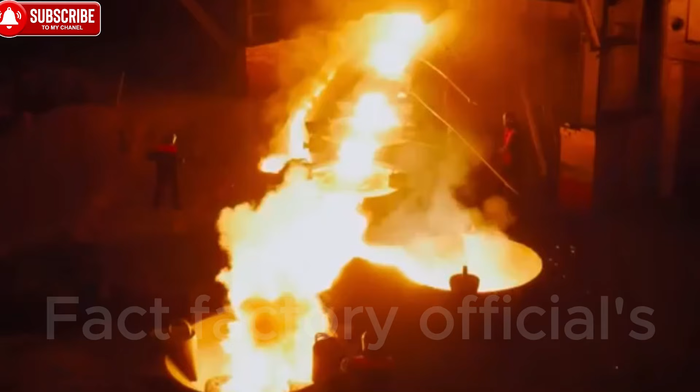Did you know that the same metal used in weapons that once changed the course of war, from supersonic jets to deep-diving submarines, is also inside the phone you're holding? That metal is titanium, one of the strongest and most resilient materials ever mastered by humans.

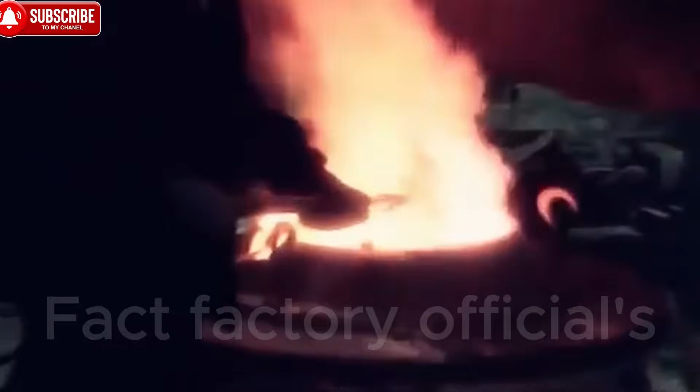Although fairly common in the Earth's crust, titanium rarely exists in pure form. Instead, it lies hidden in hard minerals like ilmenite and rutile, making extraction extremely difficult. To bring it into usable form, the ore must be crushed, refined multiple times, and heated at extreme temperatures. Only after passing through each of these demanding stages does titanium emerge as a dull, silver block, light yet remarkably tough, able to withstand seawater, extreme heat, and relentless corrosion.

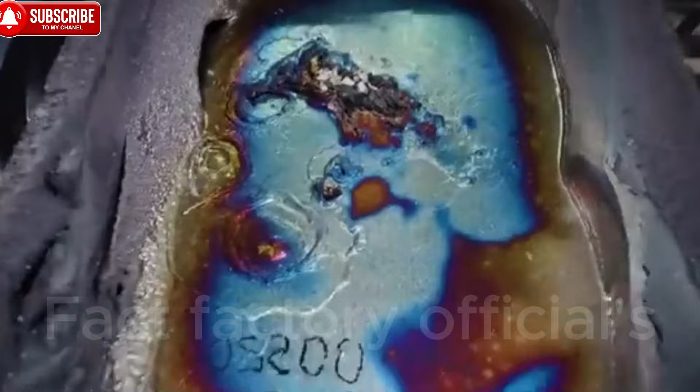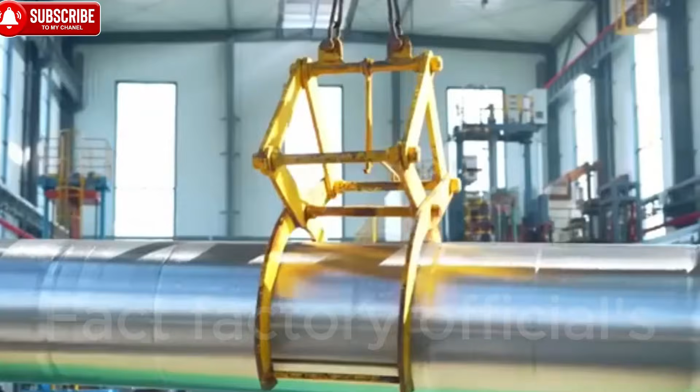This is more than a story of metallurgy. It's proof of humanity's drive to expand the limits of what is possible. Stay with us as we follow the journey of titanium, an element as steadfast as it is untamable, and uncover how it has finally been conquered.

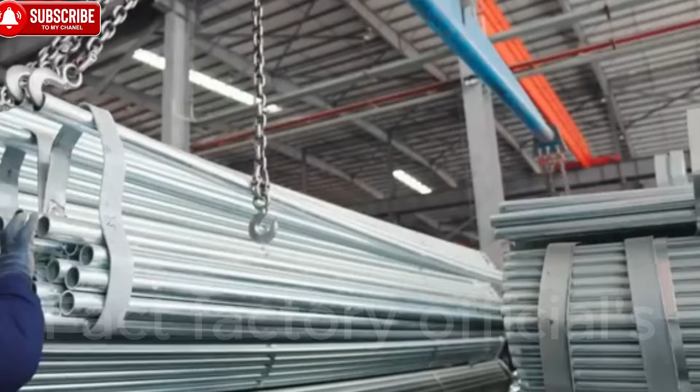Titanium's role in modern civilization. Titanium has moved far beyond being just a chemical element. It has become the material capital of our civilization. Its true value lies in unlocking what was once impossible: lighter yet stronger aircraft, corrosion-resistant submarines, and medical implants that can last a lifetime. In this way, titanium not only fuels billion-dollar industries, but also redefines safety, health, and technological progress, cementing its role as a driver of advancement.

Even so, titanium isn't always the ultimate choice. Its high extraction and processing costs often push industries to favor aluminum or steel, materials that are cheaper and easier to produce. Even Apple, which once positioned titanium as the hallmark of premium design in the iPhone Pro, is now reportedly considering a return to aluminum for both economic and environmental reasons.

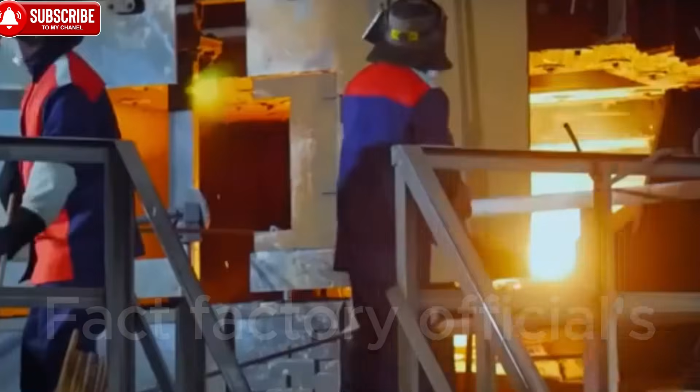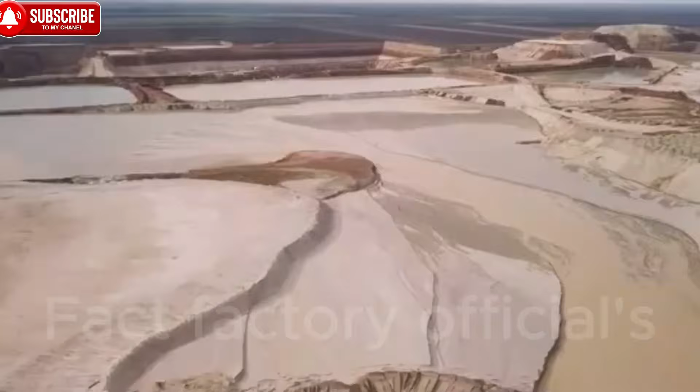Titanium ore mining and beneficiation process. The process of extracting titanium begins with surveying and mapping deposits rich in ilmenite or rutile. These two minerals contain the highest concentrations of titanium oxide and are typically found in coastal sand dunes or buried deep within ancient rock layers.

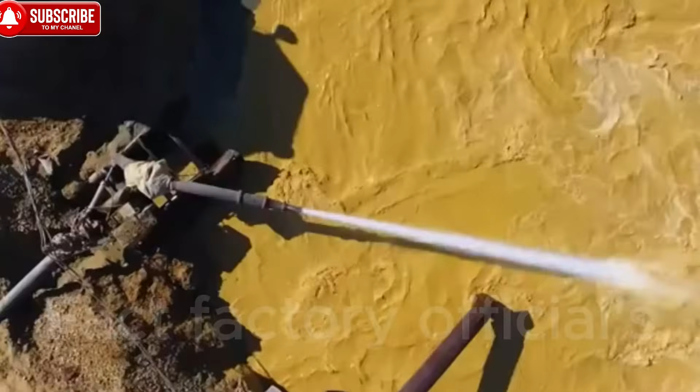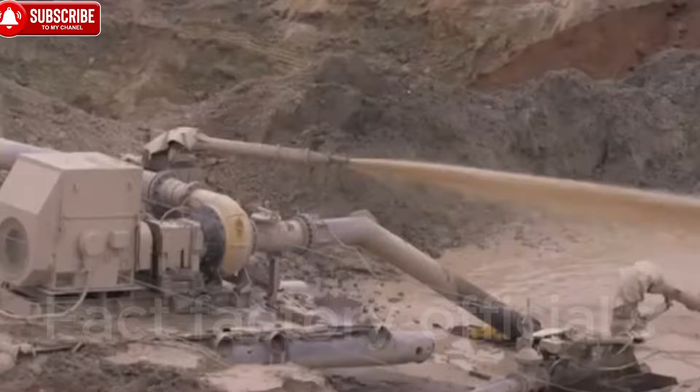In coastal placer deposits, large-scale hydraulic pumps blast powerful streams of water into sandbanks to loosen the ore grains. The water not only washes away impurities, but also exploits density differences. The heavier titanium-rich particles quickly settle, while lighter sand is carried off. The resulting slurry is then channeled through pipes or flumes into a primary separation station, greatly reducing the volume that needs to be moved by heavy machinery.

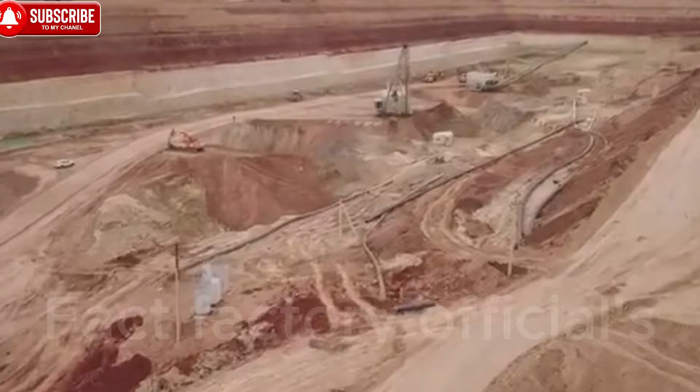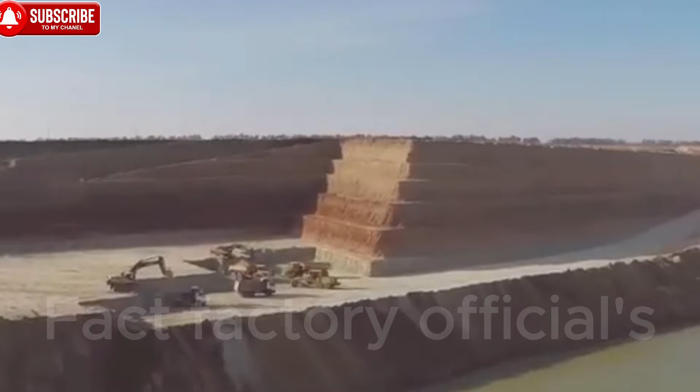For inland deposits, the approach is different. Heavy excavators strip away the overburden to reach the ore body directly, after which specialized trucks haul the raw material out. At the stockyard, the ore is screened and washed to remove soil and gravel before being delivered to processing plants. Whether from coastal placers or inland mines, the common thread is the sheer mass of material that must be shifted and the enormous amounts of water consumed, factors that make titanium mining as much an environmental management challenge as it is a technical one.

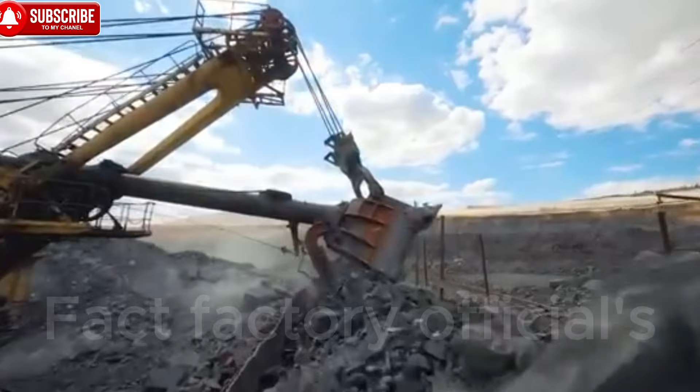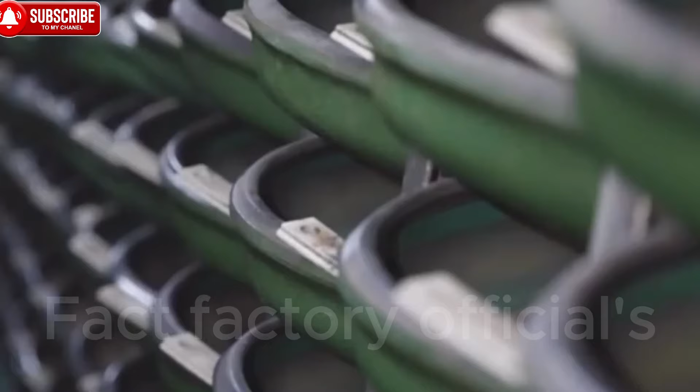Once the ore has been extracted, it is crushed into smaller fragments and fed into a series of separation processes. Gravity separation isolates the heavy titanium-bearing particles. Magnetic separation removes iron-rich minerals, and flotation eliminates silica along with other light impurities. Each stage acts like peeling away successive layers of armor, leaving behind only the concentrated ore with a titanium dioxide content high enough for industrial use.

This marks the close of the mining phase, where a mass of dull reddish-gray sand is gradually transformed into a strategic raw material ready to begin its next journey.

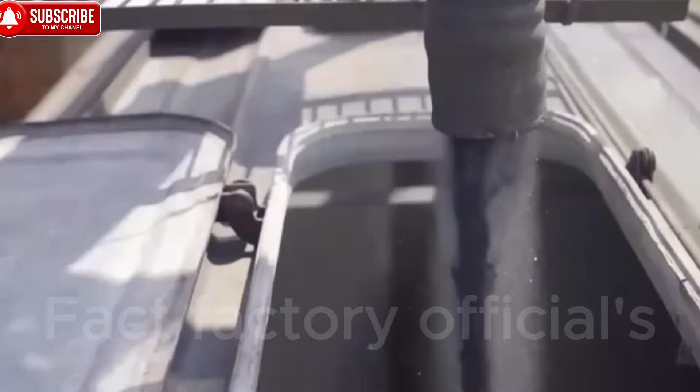Kroll process, from ore to titanium sponge. Once the titanium concentrate has been enriched, it is transported to metallurgical plants for the decisive stage, transforming mineral ore into metal. The first step is converting the ore into an intermediate compound.

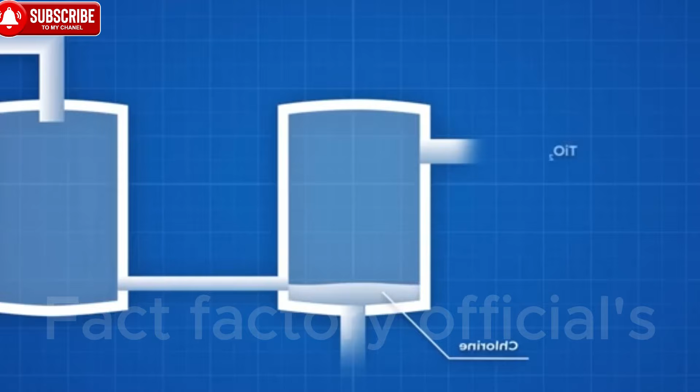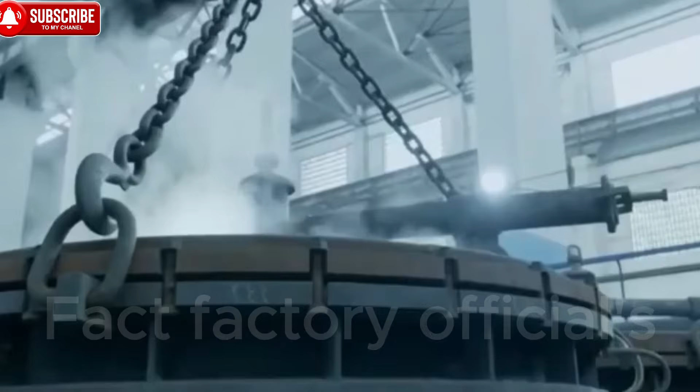Inside sealed furnaces at extreme temperatures, the ore reacts with chlorine gas and carbon, producing a liquid compound that is easier to handle. This solution is then filtered and distilled repeatedly to remove residual impurities like iron or manganese, since even trace amounts can undermine titanium's remarkable strength. When the intermediate compound reaches the required purity, it is introduced into massive steel reactors.

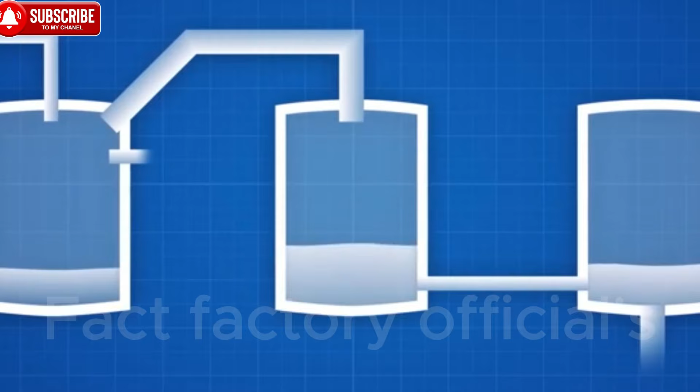There, it reacts with a stronger metal, usually magnesium or sodium, under intense heat and tightly controlled conditions. Over the course of many hours, titanium gradually precipitates, forming spongy deposits that cling to the walls of the reactor. What emerges is not a gleaming ingot, but porous titanium sponge, gray-silver in color, rough in texture, and riddled with tiny voids like a honeycomb.

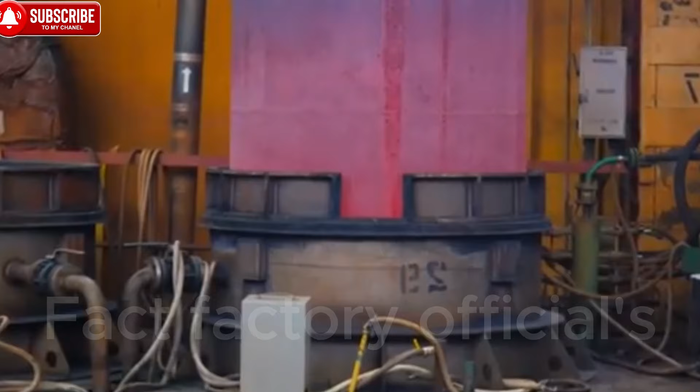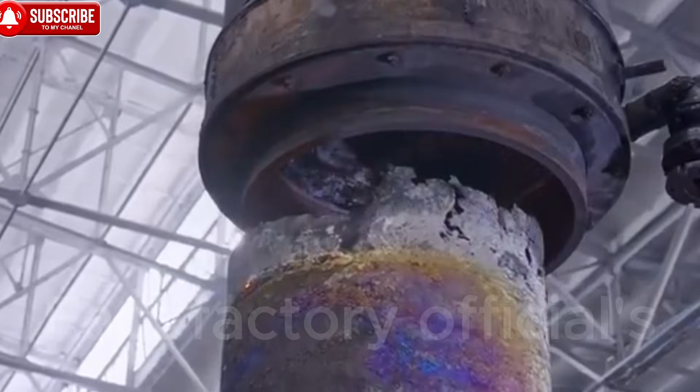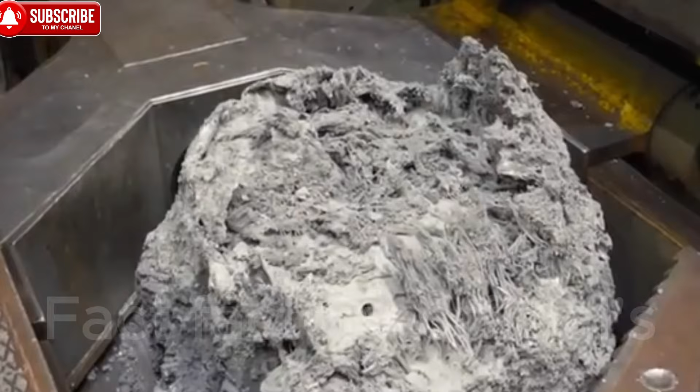After the reaction ends, the reactor is cooled and opened. The coarse sponge blocks are removed, broken into smaller chunks, and washed to eliminate residual salts. This is the very first appearance, still brittle and impure, not yet ready for practical use, but representing a turning point. From an anonymous ore buried deep underground, titanium has finally taken shape as a real metal, poised for the next stage of refinement. Vacuum arc remelting stage.

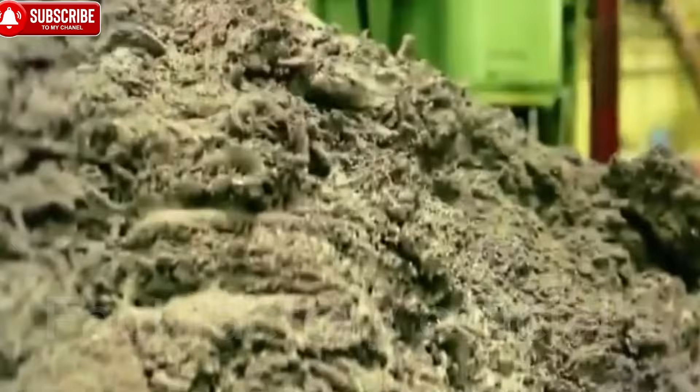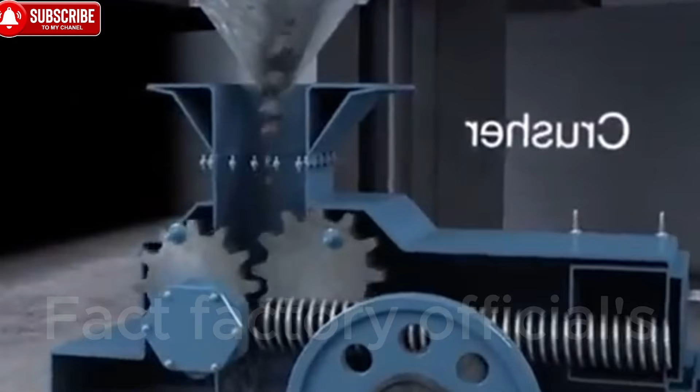When the Kroll reactor is opened, the raw titanium sponge emerges, its silver-gray surface rough and uneven, still coated with residual salts. The first step is breaking it down. The sponge block is cut into smaller chunks, both for easier handling and to remove the outer salt layer. These fragments are then washed in a specialized solution to dissolve magnesium chloride and other lingering impurities. Once cleaned, they are carefully dried, yielding a pure titanium sponge.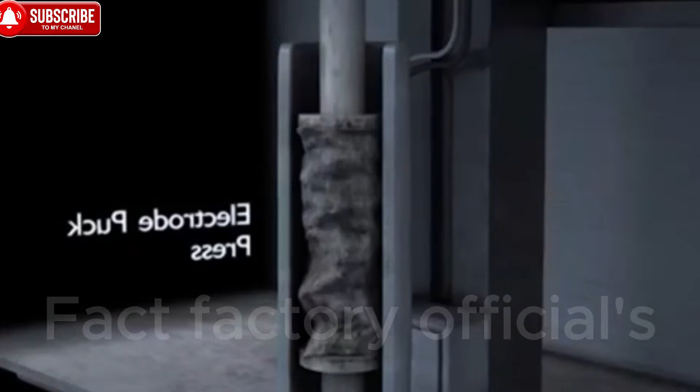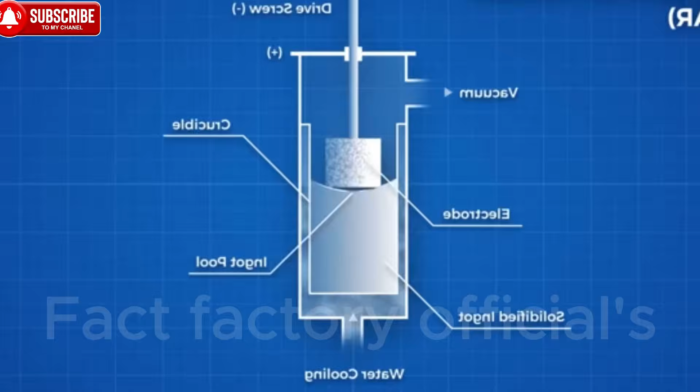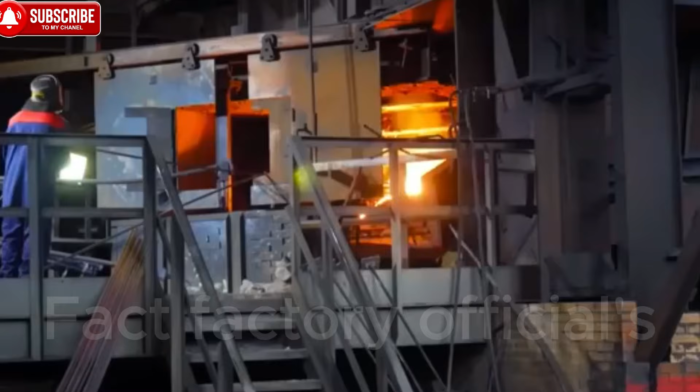The purified titanium is then ground and graded before being compressed into solid blocks known as titanium electrodes. This prepares the material for the most advanced stage of refinement, vacuum arc remelting. Inside a VAR furnace, the titanium electrode is positioned vertically above a water-cooled copper crucible. As a powerful current strikes, an intense electric arc ignites, melting the titanium layer by layer. Droplets of molten metal fall to the bottom, gradually consolidating into a dense ingot of titanium, uniform, highly pure, and ready for use in industries where strength and reliability are paramount.

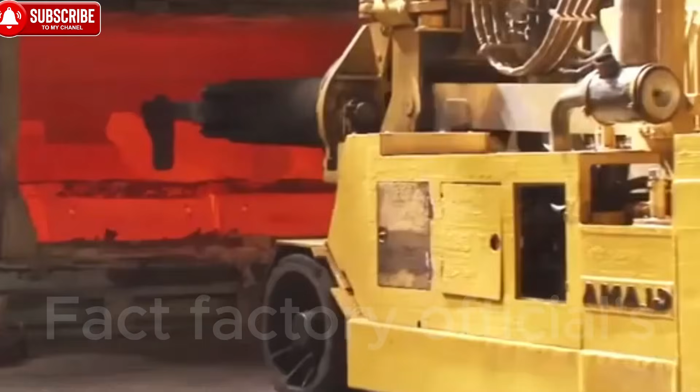Forming and precision CNC machining. Fresh out of the furnace, the refined titanium ingot still glows red-hot, with its surface temperature soaring above 1832 degrees Fahrenheit. In this state, the metal is far more malleable, making it ready for the first stage of shaping.

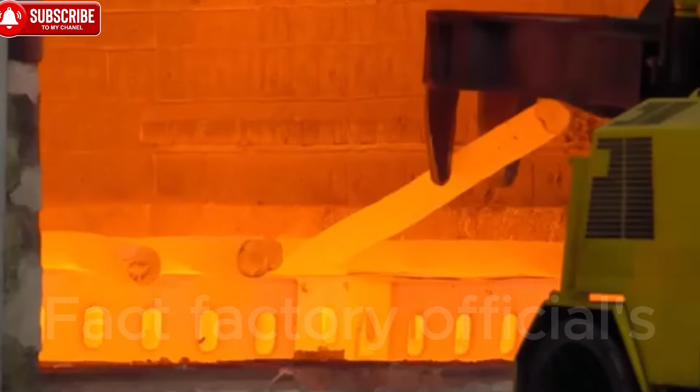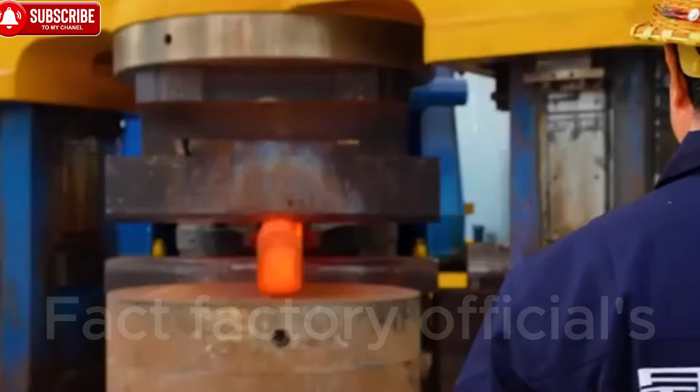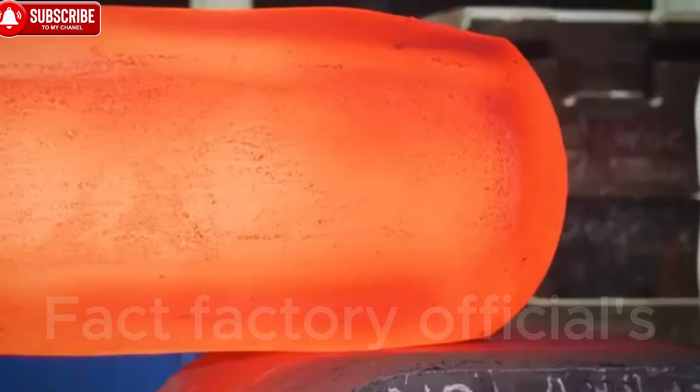A massive robotic arm clamps onto the multi-ton ingot and transfers it into a hydraulic press. Here, giant pistons descend with crushing force, each strike echoing like thunder. Under this immense pressure, the rough cylindrical block begins to transform. Its surfaces are flattened, its length stretched, and its shape made more uniform. Just as important, the forging process densifies the internal structure, eliminating the tiny voids left from casting and realigning the crystalline grains, giving the titanium greater mechanical strength.

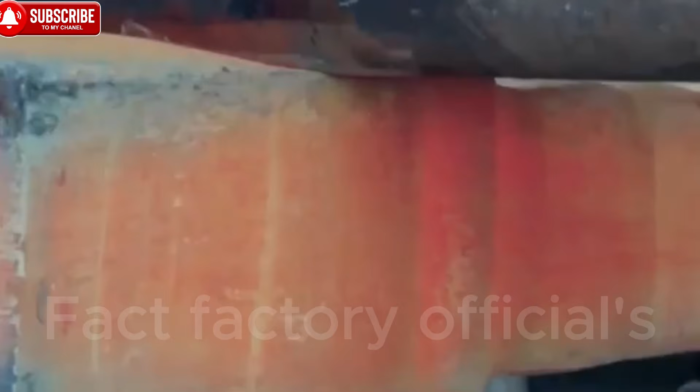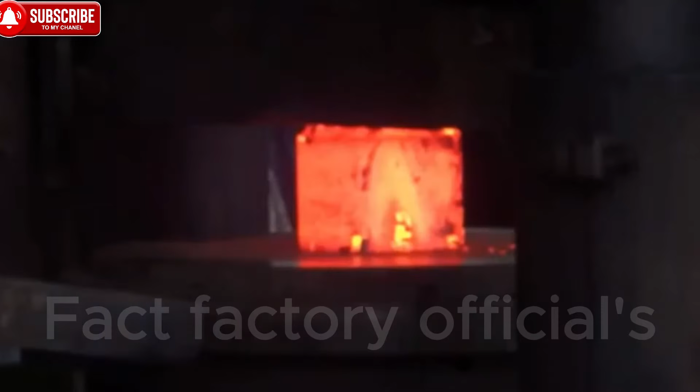Through repeated pressing cycles, the glowing ingot gradually becomes a precisely formed billet, consistent in quality and shaped for the next stage of rolling, forging, or precision machining. This marks a pivotal moment when titanium leaves behind its raw cast form and enters its life as a true industrial material. Once titanium has been rolled into standardized billets, the stage of mechanical machining begins.

The ingots are first cut and ground to remove the oxidized layer formed during refining. Sparks fly beneath the grinding wheels. Every millimeter of excess metal is stripped away, leaving behind a flat, clean surface ready for precise processing.

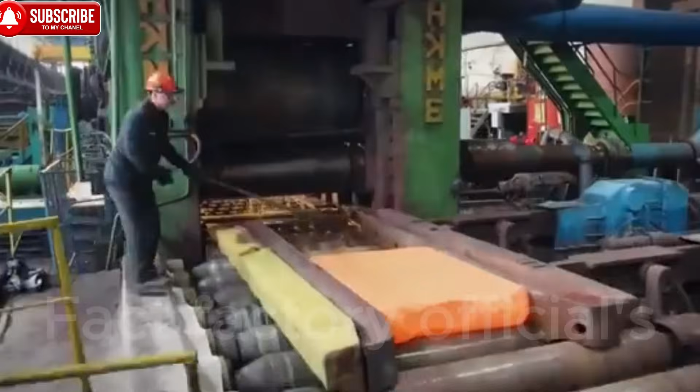Next, the titanium moves to industrial lathes and milling machines. Large blocks are cut down into smaller product-ready forms. Because titanium is exceptionally hard and retains heat, the entire operation relies on continuous cooling systems that protect the cutting tools and prevent the metal from warping.

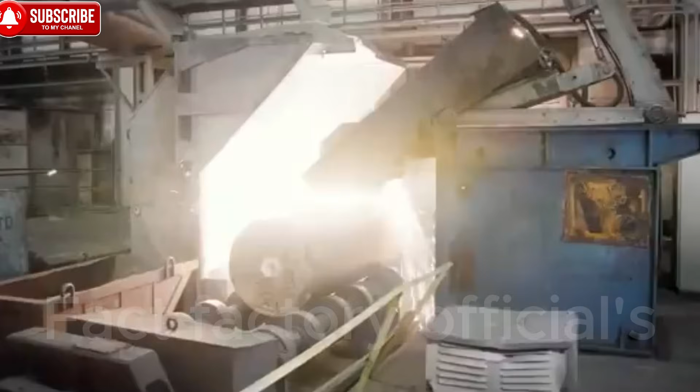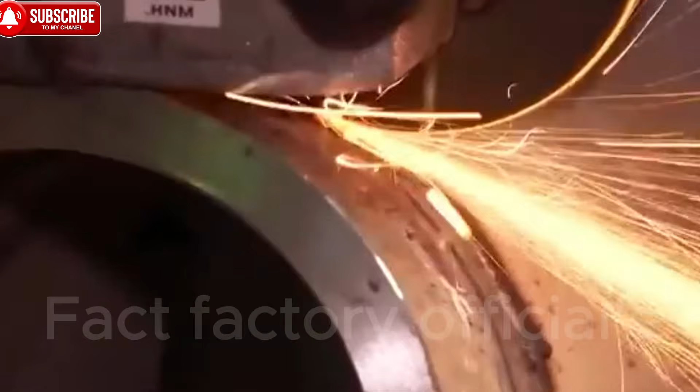The critical step is CNC machining, where computer-guided precision comes into play. On the CNC table, titanium is firmly clamped in place, while high-speed cutters follow a pre-programmed path. This enables turning, milling, drilling, and engraving to be performed on titanium, despite its reputation for being notoriously difficult to machine, with tolerances measured in mere thousandths of a millimeter.

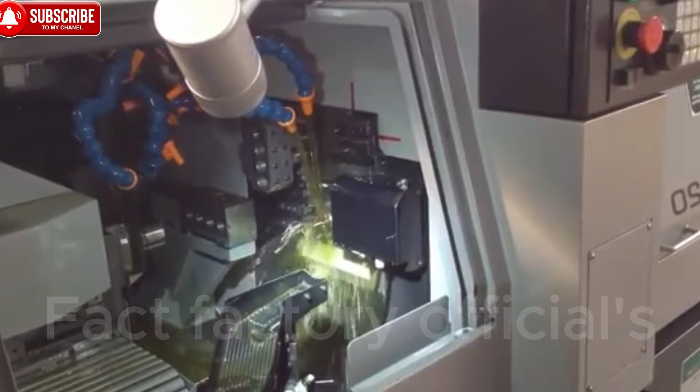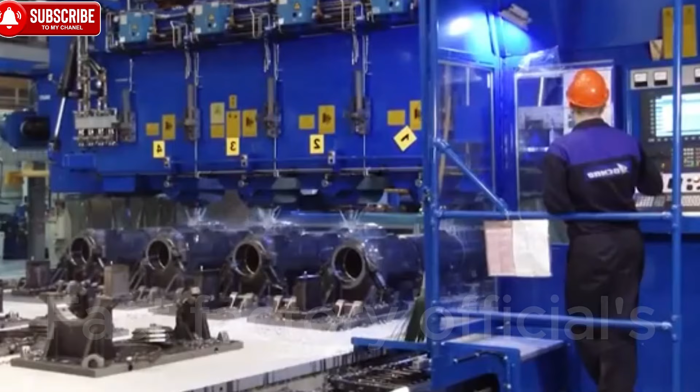It is through CNC that titanium becomes the core of high-demand components, from jet engine turbine blades to submarine hulls to artificial bone joints in medicine. Each stage of machining reflects both the power of modern machinery and the tight oversight of skilled operators. The result is highly accurate titanium, semi-finished parts, ready to serve some of the most demanding industrial and technological fields.

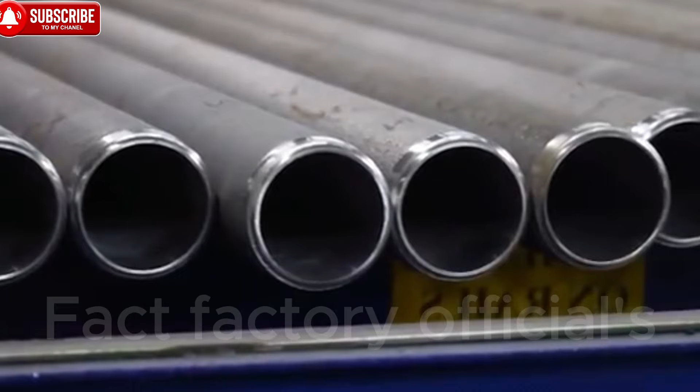Titanium bar packaging and storage. For titanium bars, once rolling and machining are completed to specification, they are bundled together, ranging from a few dozen to several hundred pieces, depending on size. Each bundle is tightly secured with steel straps, then wrapped in plastic or oil paper to protect against moisture and prevent scratches during transport.

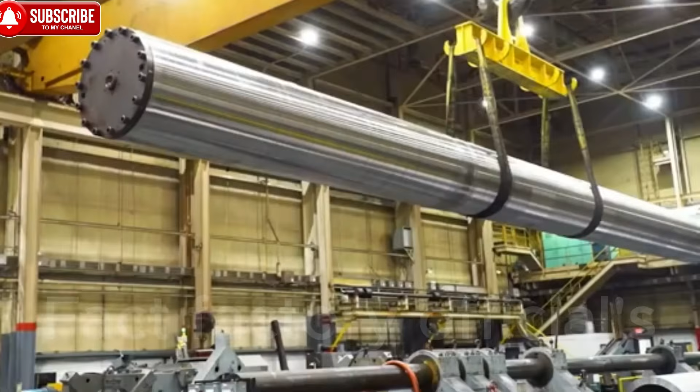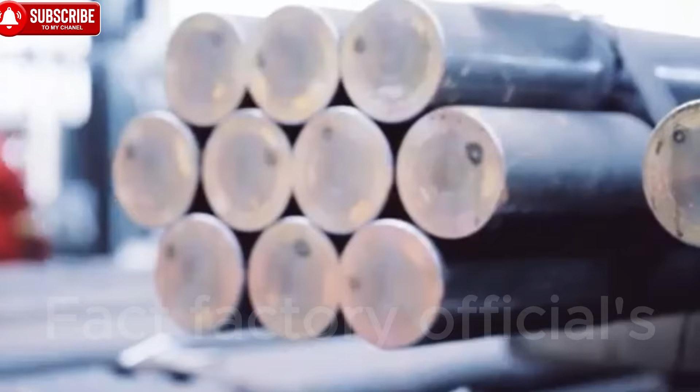At both ends of the bars, manufacturers print or attach identification tags with detailed information: alloy grade, dimensions, batch number, and weight. The bundles are then placed on wooden pallets or steel frames and firmly fastened with industrial strapping. This packaging shields the titanium from environmental exposure and ensures efficient handling, loading, and storage. From aerospace factories to precision engineering workshops and chemical plants, this careful preparation guarantees that the titanium arrives ready for its next stage of use.

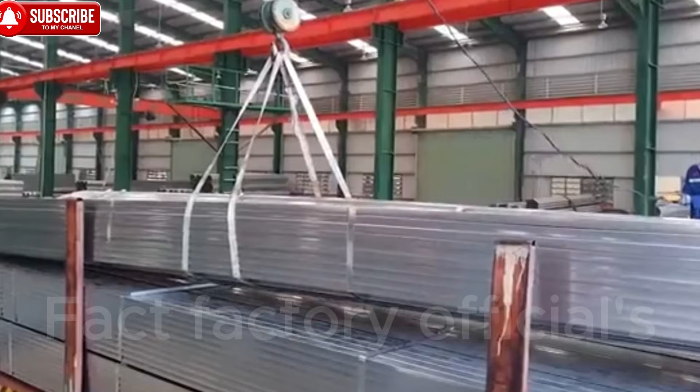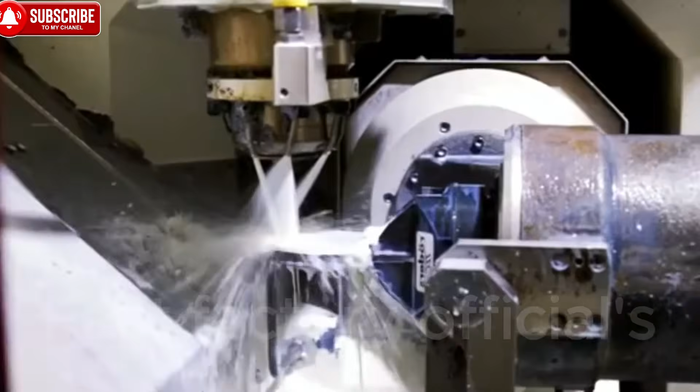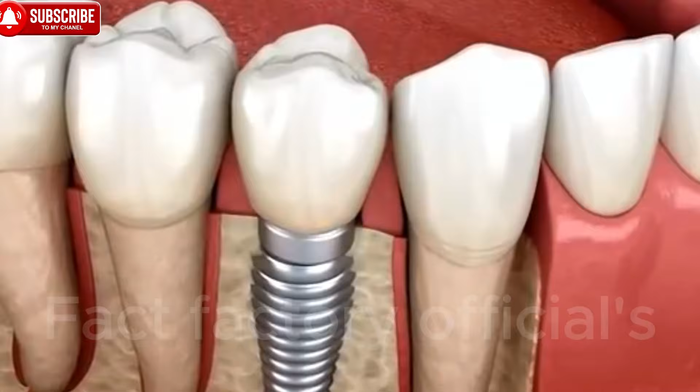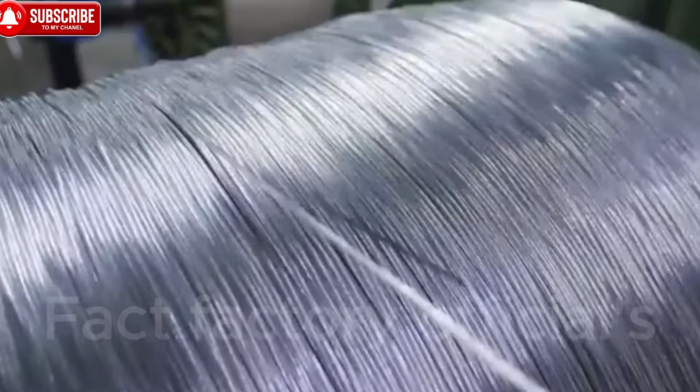If titanium is often called a strategic metal reserved for fields that demand extreme durability and resistance to harsh environments, from jet engine turbine blades and submarine hulls to artificial bone implants, then steel stands as the material backbone of everyday life. Titanium is scarce, difficult to refine, and expensive, while steel can be produced in billions of tons each year, becoming the skeleton of human infrastructure: towering skyscrapers, bridges spanning rivers, railroads, and vehicles of every kind. In other words, titanium paves the way for cutting-edge technology, while steel sustains the rhythm of global industry.

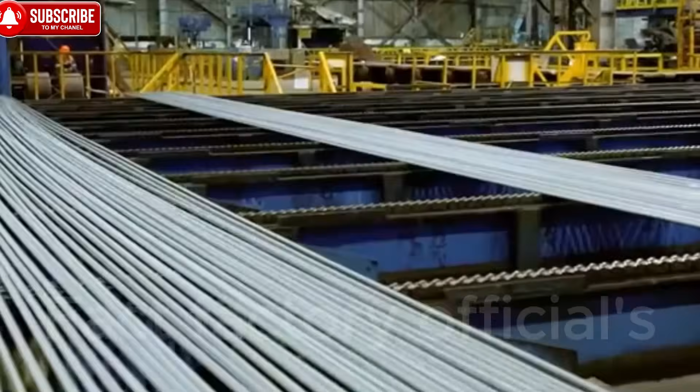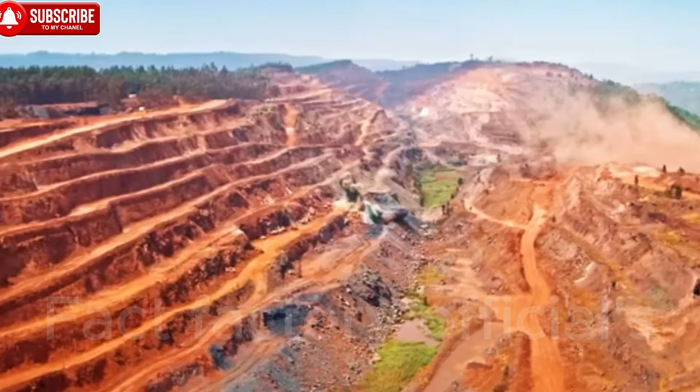The making of steel begins with the extraction of iron ore, the primary raw material. Massive open-pit mines in Australia, Brazil, India, and China account for much of the world's production. Giant excavators and haul trucks weighing hundreds of tons work non-stop, stripping away layers of earth and rock to uncover ore bodies. The most common ores are hematite, with its reddish-brown color, and magnetite, with its black magnetic character. Their iron content can range from 30% to more than 60%.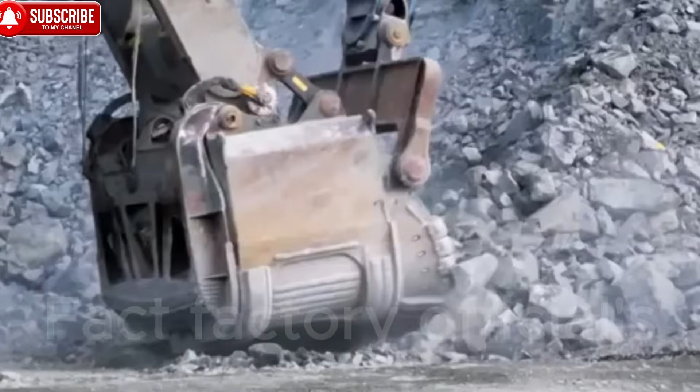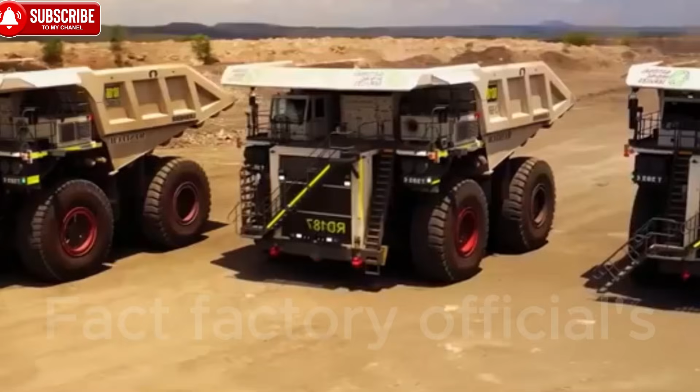Once mined, the raw ore is transported to processing plants. There it is crushed by jaw crushers and ball mills, then screened to separate iron-rich particles from unwanted rock. Processing often includes magnetic separation, taking advantage of magnetite's natural magnetism, or flotation to improve the purity of hematite for efficient smelting. Finally, the concentrated ore is agglomerated into small lumps through pelletizing or sintering, making it easier to feed into a blast furnace. Round pellets a few centimeters across are shaped from fine ore powder mixed with binders, then lightly baked to achieve mechanical strength. This form not only improves handling and transport, but also ensures good airflow inside the furnace, allowing the chemical reactions of steelmaking to proceed more efficiently.

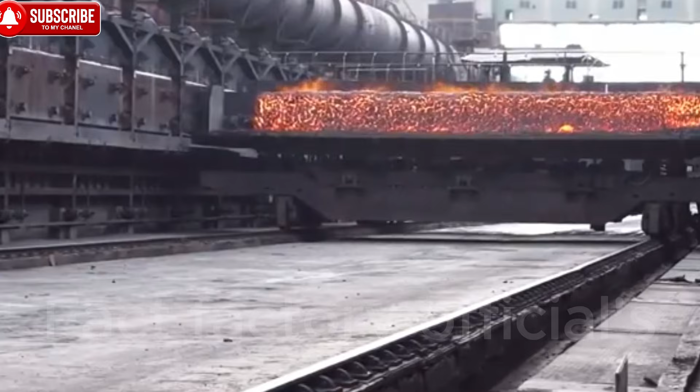The pig iron is then transferred into either a basic oxygen furnace (BOF) or an electric arc furnace (EAF). There, pure oxygen or powerful electrical currents burn away excess carbon and remove unwanted elements like sulfur and phosphorus. Through this refining step, the pig iron is transformed into liquid steel, with its carbon content adjusted to usable levels.

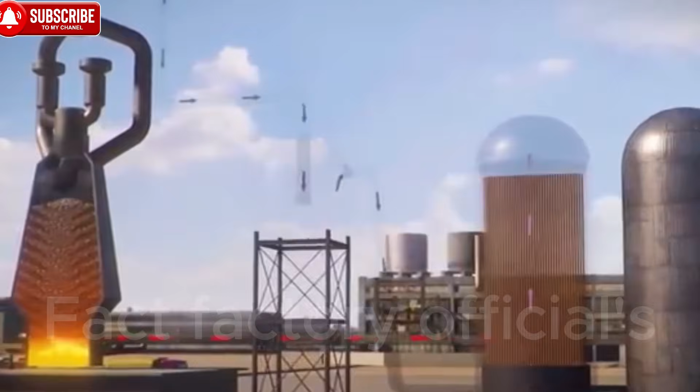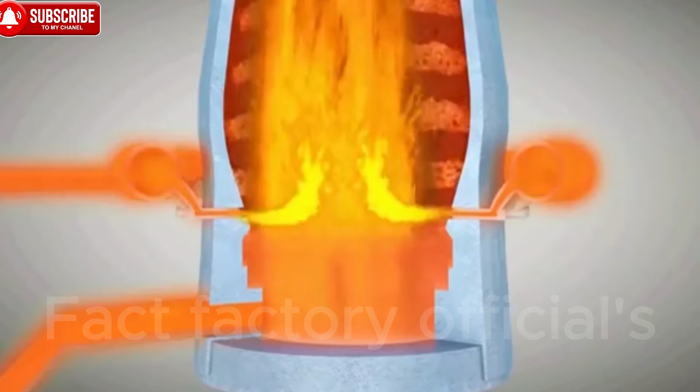Next comes continuous casting. The liquid steel is poured into water-cooled molds, where it gradually solidifies into semi-finished shapes: square billets, flat slabs, or round blooms, each destined for different applications.

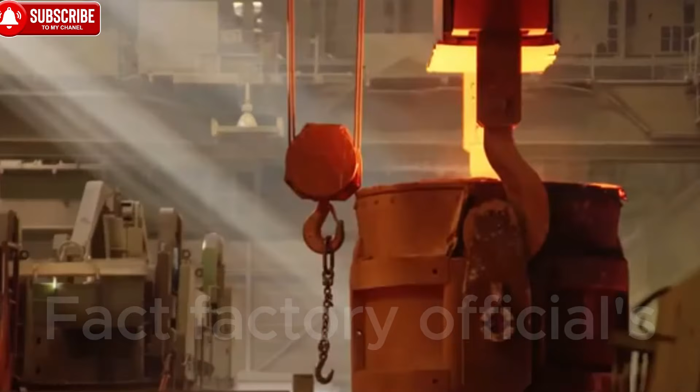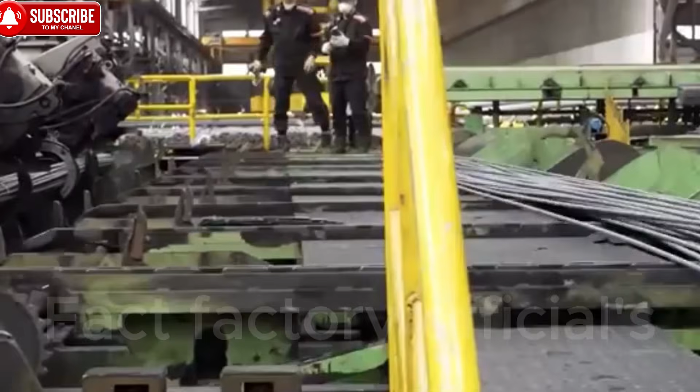The final stage is hot rolling and cold rolling. Reheated steel passes through massive rolling mills, where pressure and heat reshape it into countless forms: ribbed rebar for construction, large plates for shipbuilding and automotive manufacturing, and coiled sheets for machinery and engineering. This is the point where steel moves from raw material to universal product, integrated into every facet of industry and daily life.

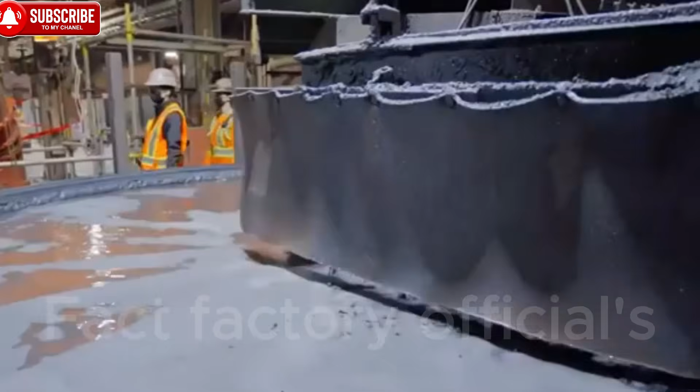Conclusion. From dull gray ore deposits rich in ilmenite or rutile, titanium undergoes a grueling journey: crushed, refined, reduced to sponge, and then purified in vacuum arc furnaces until it becomes a gleaming ingot. Next, through massive presses, rolling mills, and CNC machines, precise to 1/1000th of a millimeter, titanium is shaped into flawless semi-finished forms.

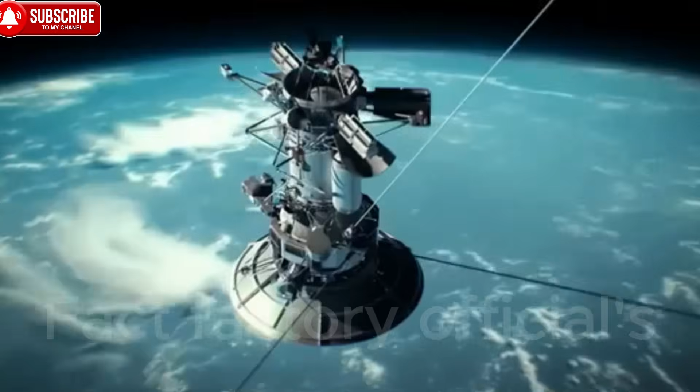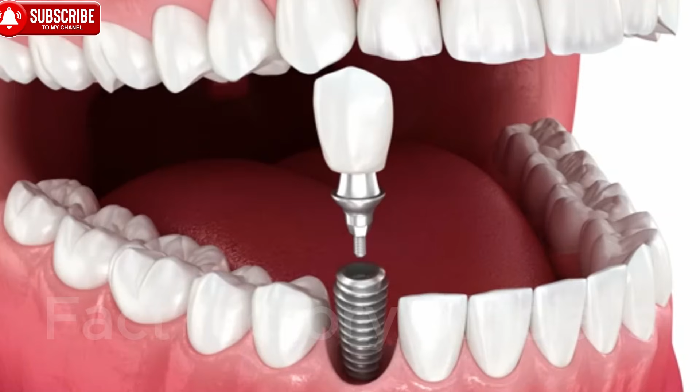From there, it enters the realms of aerospace, defense, medicine, and technology, fields where no ordinary material can take its place. This journey reveals that titanium is not just an element, but a symbol of humanity's drive to push boundaries. Every titanium product is a snapshot of technological history, a material that resists salt water, extreme heat, and crushing pressure, yet remains light enough to fly and strong enough to endure decades of use. Titanium has helped shape the face of modern civilization, standing as proof that from raw minerals, humanity can forge achievements that reach both the skies and the depths of the ocean.